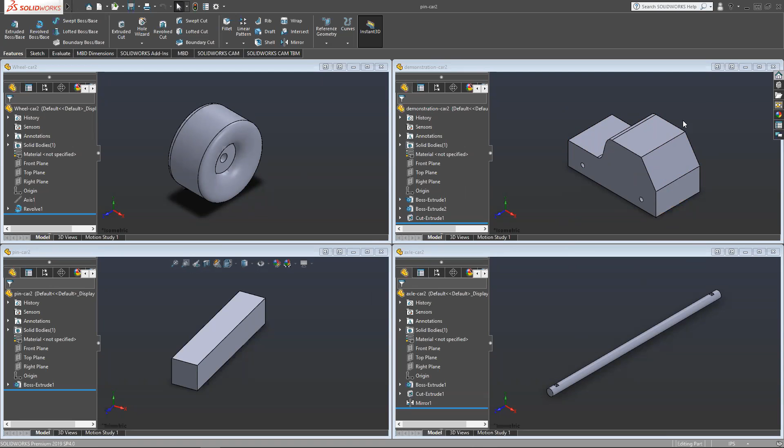So we're going to start with the assembly. If you're going to follow along, you should have these 4 parts from Part 1. One of the things you can do in SolidWorks is go to one of your parts and have it be the main part of your assembly. To start any assembly, you need that main part that's going to be the origin for all the other parts to mate to, which is just where they attach.

So we're going to make the body our primary component. What we can do is go up here to the top left, right where it says new. We can click the drop down arrow or click on new. It'll pop up a separate window. We can go down to make assembly from part/assembly. When we click that, you should be on a new screen and all the documents you have open will automatically appear here.

I have mine named demonstration car 2, and that's my body. Oh shit, that's not drag. Okay, never mind, not drag, just select and click, and bam.

So now we're in an assembly. This isn't a drawing anymore. The name kind of changed at the top. I can't see it, the zoom thing's in the way. But it says assembly, right? Unnamed assembly or something.

So as you can see here, things are different. We have our part here, and we can click the drop down arrow and still see all the extrudes and cuts and everything, and most importantly, its planes. We also have this thing here called mates, which is how things are connected together.

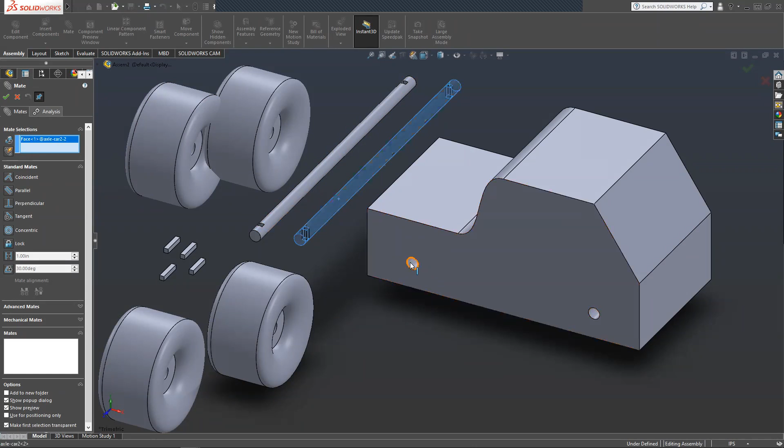So you just start selecting stuff, and SolidWorks is smart enough to kind of know how things fit together. So I don't have any specific type of mate selected, but I'm going to click on the outer surface, the cylinder shaped surface of one of the axles. See, it already says face 1 axle. And then I'm going to click on the inner surface of the car, where I want the axle to go.

And it's already going to concentrically mate it, even though I didn't tell it to concentrically mate. That's what I wanted it to do. SolidWorks is usually pretty smart with these standard mates. So you can see they're called standard mates here on the left.

And it knows pretty much what you want to do. Before you start clicking on everything really fast to put things together, you've got to make sure you click that check mark, or else you'll keep changing the mate selections in this box, and you'll start mating things you don't want to mate together. So always make sure that after you do your mate, click that check mark, and then do the next one. I'm going to exit the mate menu real quick just to demonstrate something.

So now this axle is concentric to that hole on the body, right? But guess what, that's all they are. They're just concentric. So this thing can be all the way over here, and SolidWorks won't know the difference because it doesn't know it's supposed to be anywhere else. But we want this to be like inside the car at all times. That's where the axle's supposed to go.

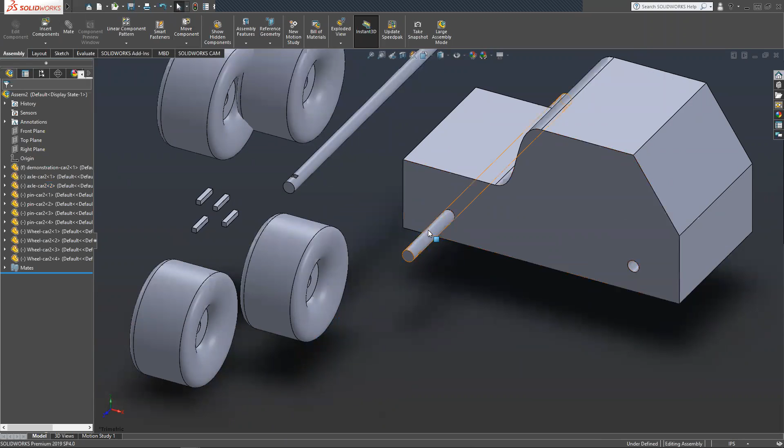So you can add multiple mates to these things, and there's two ways we can go about this. We could either do what's called a width mate and say, hey, this end of the axle and this end of the axle are supposed to be between this side and this side of the car, and put it perfectly in the middle. Or we can mate the planes of the individual parts together. We'll do that one first.

The planes mate is we can click on this drop down arrow for the body, right? We can see if we go to its planes, the front plane, top plane, right plane, that it still has its cardinal planes. Let me just adjust it. It still has its cardinal planes, and most importantly, the front plane is still bisecting it because it's its own front plane.

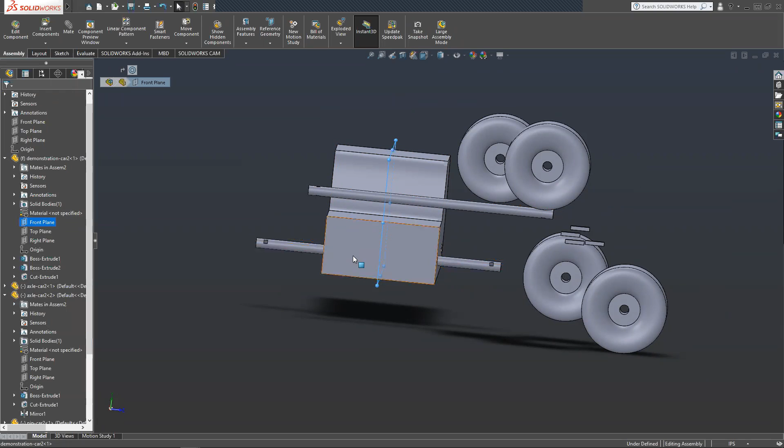And likewise, if we go to the axle of the one we already mated concentrically to our car, you can see it has its own planes too. In this case it's my axle 2, but you might have selected axle 1. So we can select the two front planes. In this case, as you can see, they're almost already lined up, but they're not mated together. We can click that mate, and bam, it already shifted it over. It already knows what you want before you even want it. It's amazing.

Yes, so it already has them selected because we already selected them and mated them together. If we didn't have it selected, say I only had one of them selected, you can click up here in the top left of the viewing screen, just right of the column on the left, and click this little drop down arrow. It might be hard to see on my screen because I have dark theme, but right underneath the assembly you can click the drop down arrow and see all your parts. And they have their own little drop down arrows, see?

Then you can select from, in my case axle 2, that front plane, and it will mate together. You can specify—in this case they already knew we wanted coincident—but if you want parallel, you can specify a distance they are apart or a degree they are apart, weird stuff. But we'll just click that check mark, and now it doesn't move, it only rotates in place. It won't slide out of the body, so it's just rotating in place. And that's awesome.

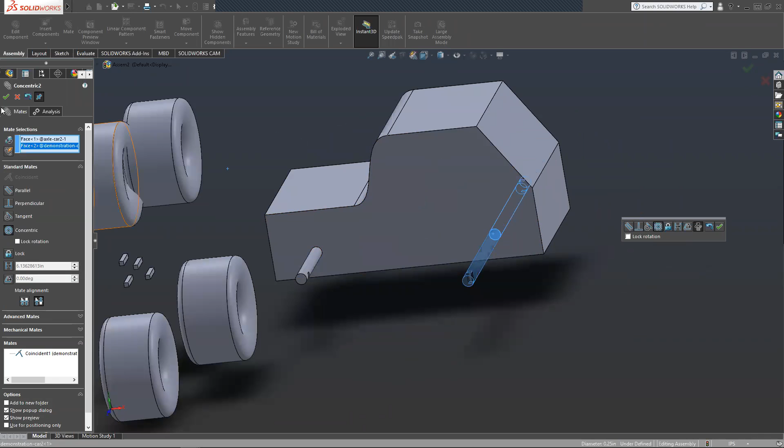Now to do advanced mates, SolidWorks is smart, but it's not that smart, so you have to tell it what advanced mate you want before you start selecting everything. You click right here on the left underneath standard mates, where it says advanced mates, and click the drop down arrow. It will automatically retract the standard mates, so don't keep looking down, look back up. Right here you have things like profile center, symmetric, width, path mate—more advanced ways of saying these two parts are supposed to move together. The one we're interested in is the width mate.

So what this one does is you can select two sides or lines of two different parts or multiple parts, and that'll be like 'width one,' and then the other one's like 'width two.'

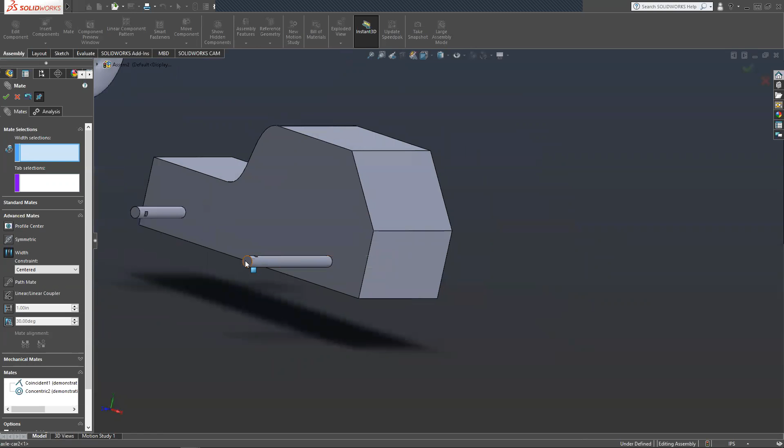You do the same thing for another set of parts, like, okay, you want these to be midpoint with each other, right lined up. So in our case, we select one circular end of our axle, the other circular end, then one side of our car and the other side, and it slides right in, perfectly in the middle. If I get normal to that face, see, it's perfectly flush, you can't even see the other axle.

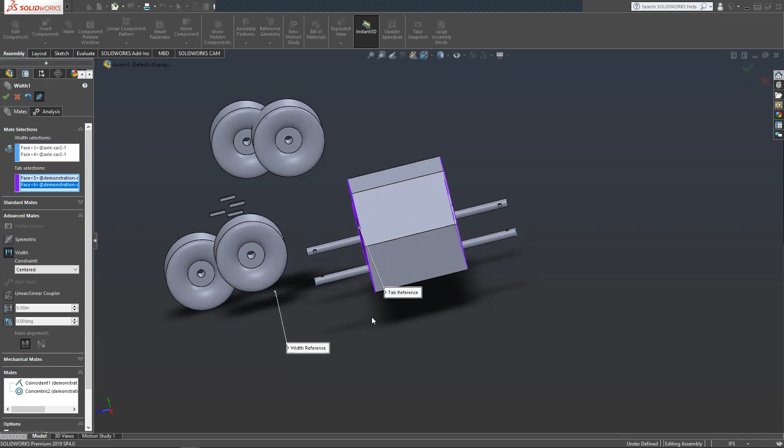That's a good way to fit things perfectly together if the planes don't line up with each other. Like if we designed this axle and just projected it straight out of the front plane instead of doing a mid-plane projection extrusion, the front plane would be all the way at one side, then we couldn't just mate the planes there, but we could still do this because it isn't dependent on the cardinal planes of the part.

So we click OK, and bam, we already got our axles in. Pretty nice. We'll do the same thing with the wheels, but with the wheels we won't have as rigid constraints—they're just kind of going to be on the axles.

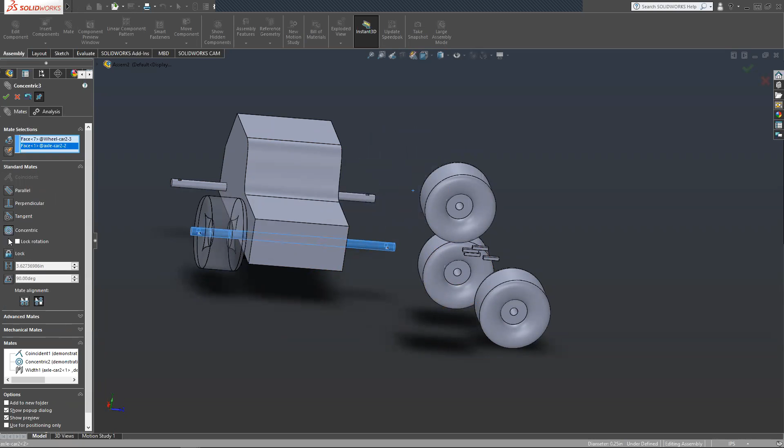So we check marked so we're out of that advanced mate. We'll click on the inside of that and slap it on our axle. Oh sorry, we're still in advanced mates—see, we gotta go back to standard mates. If something's not happening, maybe SolidWorks isn't sure how you're putting things together, so you just tell it what you want it to do. See, it wasn't knowing what I wanted, so I told it, make it concentric, and bam, it already slapped it there.

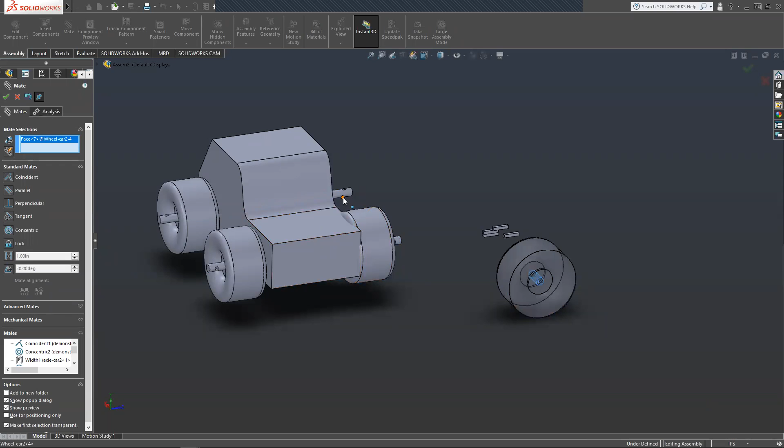Then you can lock rotation and things like that to make sure things don't move around. We'll say okay to that, and we'll do that three more times for the other wheels. See what I mean? Make sure you check mark it before you start selecting other stuff, or you can inevitably mess things up. Bam, check mark. Bam, all right, perfect.

So yeah, these wheels are kind of still floating, same thing with the axles before we gave them that other mate—just floating around. We'll change that in a second. For now, I'm going to put them a little closer so we have a good view of the pin slots. But we're going to make these pins now.

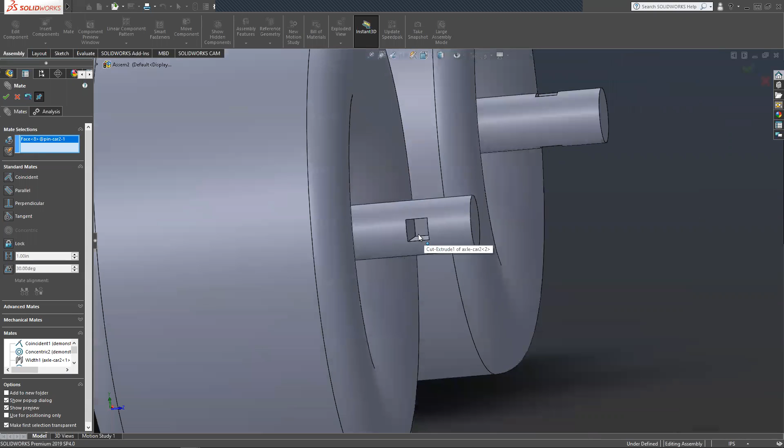To get the pins to go into that hole, you're going to have to do a few things. We can select one face, any face will do, and mate it to the inside of the pinhole. If we check mark that, it's mated to that face and stays there, but it's free to go everywhere else. So we got to specify another face or a line—you can mate edges with each other, with faces, or things. You can mate anything together, really.

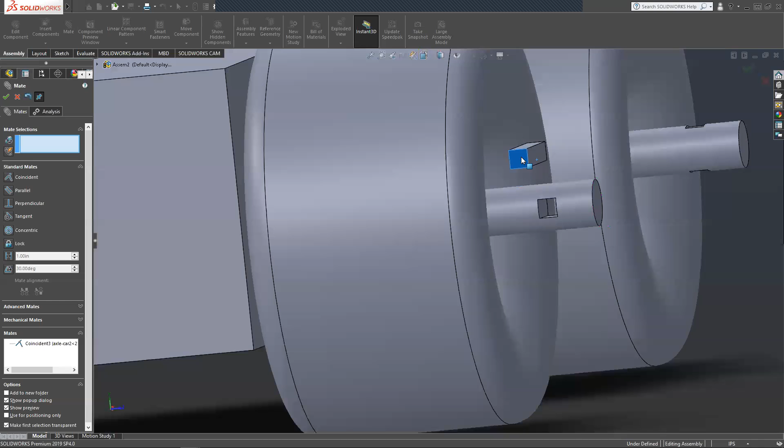So in this case, we could mate this line with the interior face and say coincident, yes. But that didn't really do anything because it's just re-specifying that we're constricted to this little plane of movement. So we need to select this face to mate here to get it inside the pinhole. See, now it's inside the pinhole, but it can still go in and out of the hole and even rotate the shaft. It's pretty cool.

So, is there a way to change this? Why, yes—there's always a way to do things differently. If we go back to our advanced mates, we can do width mate again.

We can select the two sides of the pin, but this thing's rounded—how are we going to do the width mate? If we just select the whole surface, it already knows this thing's circular, and circular things have a midpoint, so it'll put it right in the middle of the circle. We check mark that, and it's perfect. Very nice.

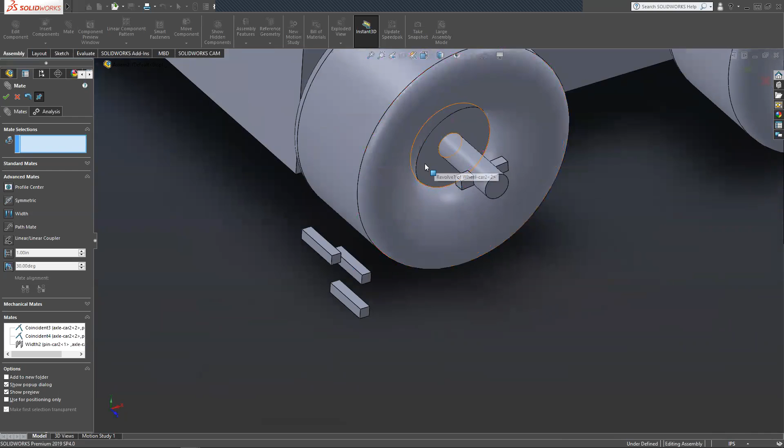Just to make everything look nice, we can select this flat face of the wheel if you design the wheel correctly from the first one. As you can see when you select a part, it knows you can't mate a part to itself unless you have two of the same part.

It's going to gray it out and you can select things through it. This is awesome if you have things inside of other things in your assembly. So we'll make them - oh, we're still in advanced mates, so we gotta go back to standard mates on the left, hit that coincident, and there we are.

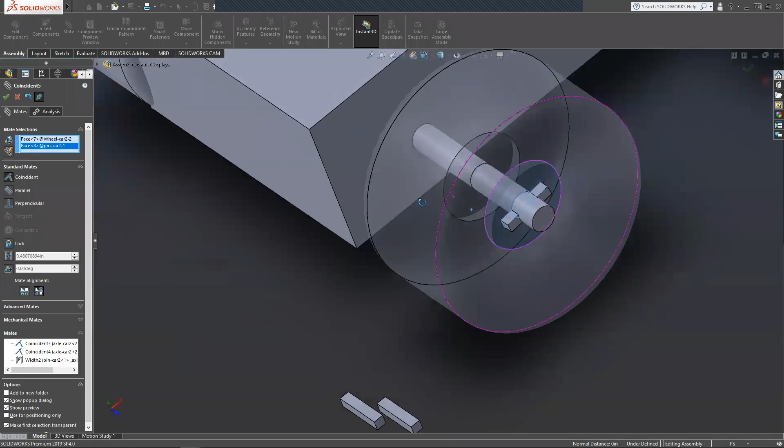Just like we did the width mate with this pin to get it right in the middle, we could have also done a planar mate, and I'll do that for this next one. So we'll get these planes together, slap them all together - bam, kind of teleport it over there.

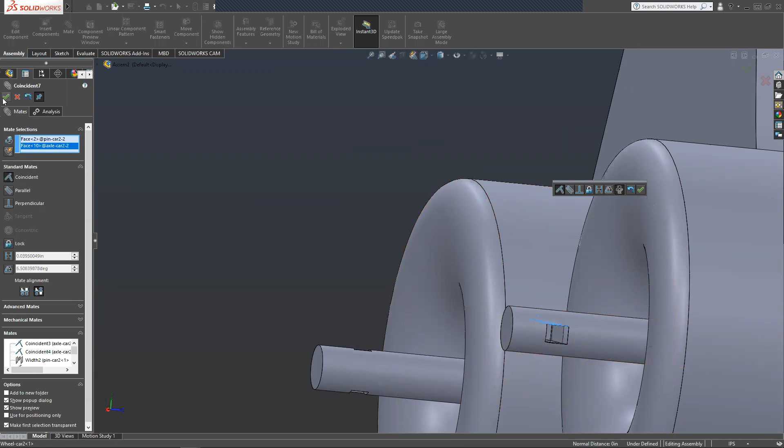So you just need two 90-degree faces to really get things to sit inside of each other. Bam. And then let's see, what pin is this?

What is this? Let me exit mates real fast. What pin is this? Oh, it's pin 2 - see right here, it highlighted it when I clicked on it. So it's pin car 2. Let me minimize some of these to make it look nicer.

So we can select pin 2. We can select its - like I said, this pin was a mid-plane extrusion, so its front plane is right in the middle of the part. And we can go to, this is axle 2 in my case.

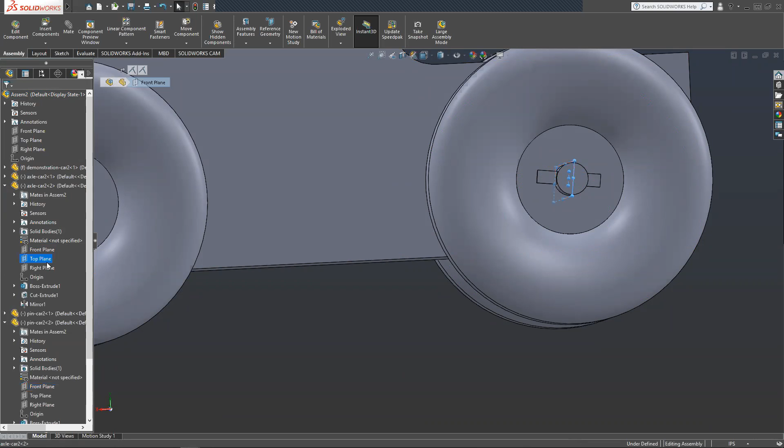Click down on it, and in this case the top plane, and just control click, so I have both of them selected. Here's pin 2's little front plane, and then this is the top plane of the other part.

As you can see, they're almost parallel already, but we can mate them together so it's doing the same thing as the width mate basically. Sometimes doing this is a little faster than clicking all the sides of the width mate, but that's for you to decide - at the end of the day, they do the same thing.

And see, when you have the plane selected, since it's just a simple coincident mate, SolidWorks can already infer what you want to do and just automatically do it. Bam, and so now that's pretty much how you do it. In this little case, those are the two ways you can mate it, pretty much.

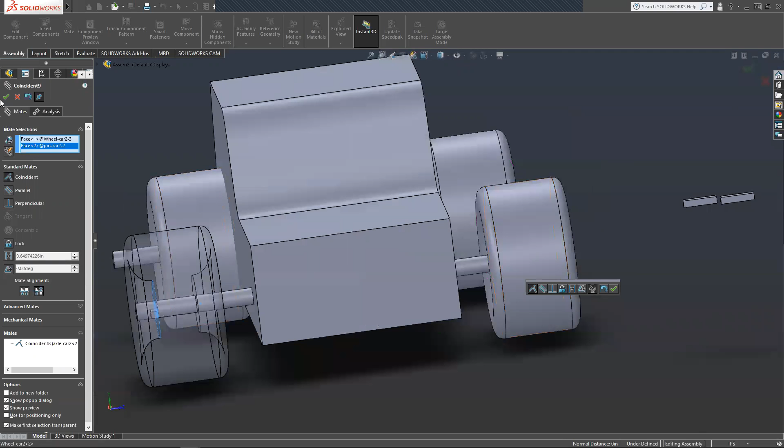So I'll just make these other pins real fast and we'll get on with it. All right, same thing. Just bam - sometimes you gotta move your assembly around.

I like to be freestyling when I assemble, you know, kind of rotating everything around like this. But some people just like to alternate between the cardinal views.

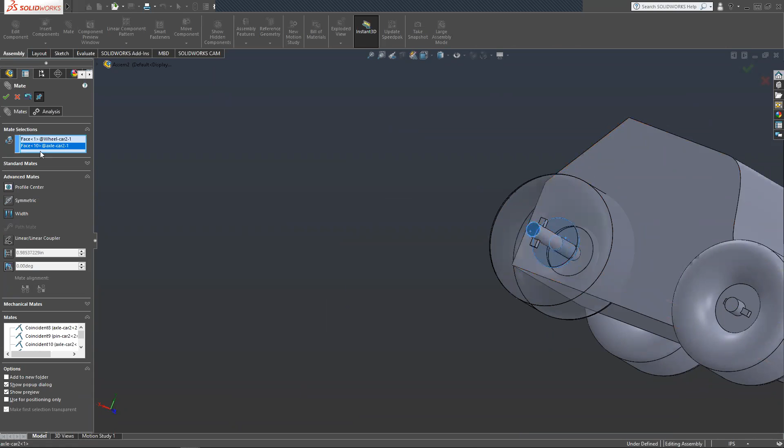Do a width mate for this one. It's pretty fun doing width mates. There's a lot more in-depth mates, but for the purpose of this simple demonstration, I'll just be showing you these standard mates. We gotta go back to standard mate, hit that coincident.

Bam. Oh, what happened there? Huh, what's going on there? I probably misclicked something. So in the event that you accidentally mate something, it is going to happen - let me now show you what to do.

You click - remember I pointed out that there was this mate thing on the left when we looked at all our parts? You're going to click that drop arrow and it lists all the mates you've made. And when you're hovering over it, it shows what's mated to what, in order of what you've done most recently - the most recent things at the bottom, the first thing you did is at the top.

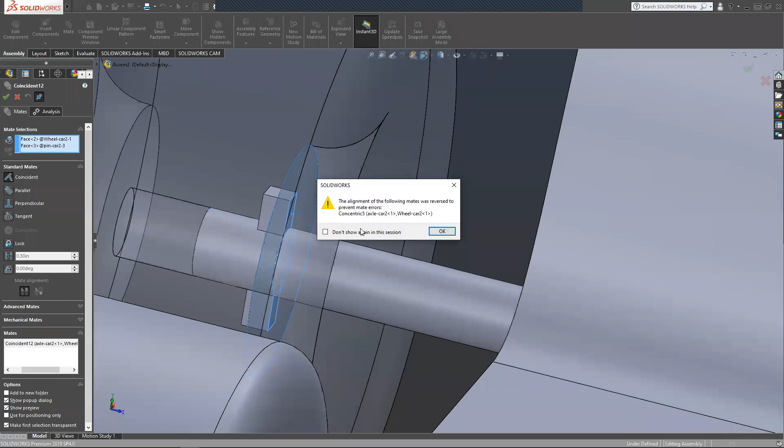See right here, I accidentally mated the front head of this axle with the inside of this wheel. So I can just select that, and you could actually edit it, I suppose, and change from the axle. You could delete that and then select this pin face. Ah, all right, that's not what we want to do.

Yeah, SolidWorks does weird things sometimes, especially when you're trying to make it not do those things. So at the end of the day, it's usually just better to delete this stuff.

When you're mating really complex parts and doing a lot of mates to get these parts to fit together the way you want, you might have to manually line them up in order for SolidWorks to realize that's what you wanted. But this is a very simple assembly, so we shouldn't have to do that.

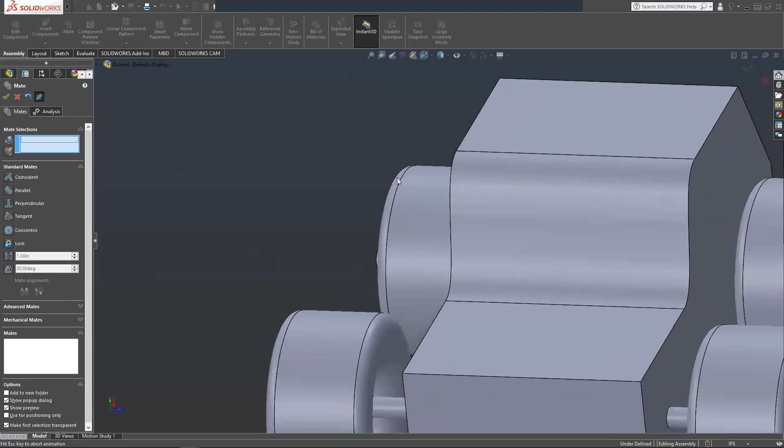So I deleted that incorrect mate and then specified it to make sure I was doing it right. Check mark. Sometimes these mates get a little monotonous - you can undo with control Z. But if that doesn't work, go back and delete. Plus, that mates menu shows you all the mates there are and what kind they are, so in case you need to reference it, always hit that check mark, kids.

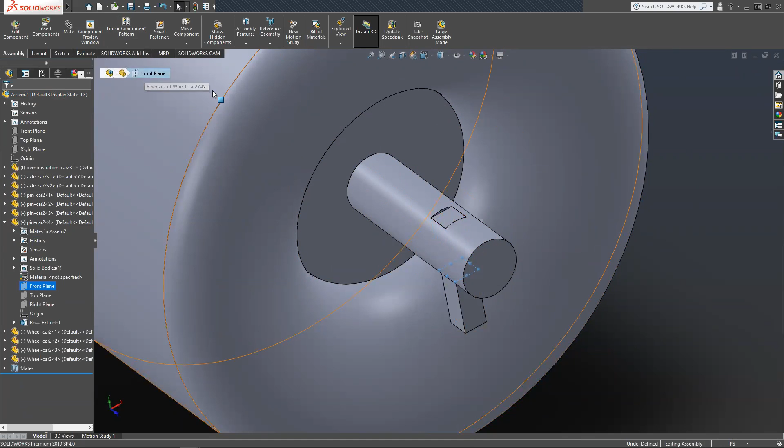It's sometimes easier to do these plane mates outside of the mate menu, just because you can see all your things in this little window instead of the one inside the window. This is axle 1, so it's going to be the top plane, mate, bam.

All right, and that's it. Oh wait, that isn't it - I almost forgot the funnest mate of them all. All right, bam. Now that is it.

We can go like that. We can exit the mates. There's our car. Looks pretty nice.

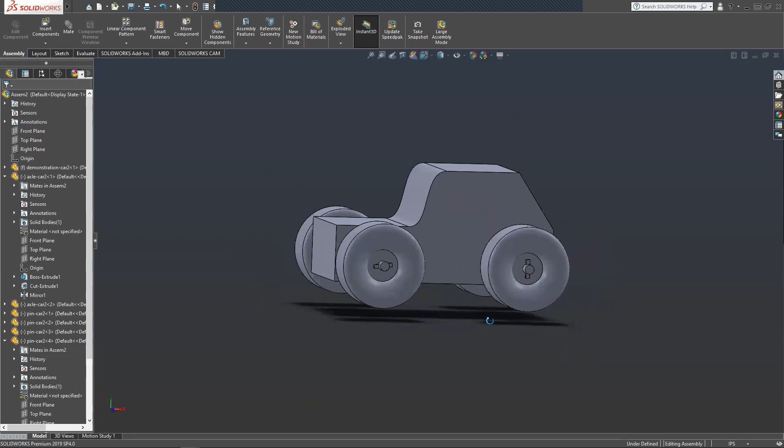So there's a lot more to assemblies, but for this fundamental demonstration of SolidWorks, that's all there is to it. So now we can start drawing our parts, which some of you may have experience with. It's a pretty fundamental skill - if you're taking engineering graphics, that's the main skill you'll learn, how to draw parts both manually and in SolidWorks. But if you're not an engineering major or haven't signed up for that class yet, we're going to start this.

Let's save this assembly. So I already did a first car as practice. SolidWorks assemblies - see, it says type SolidWorks assembly document. They save as different files from parts, so you can name them the same thing as a part.

For instance, my body is also named demonstration car 2, but since it's an assembly, I have demonstration car 2 in my files twice - one of them's the SolidWorks assembly, and it'll say .assembly, see, it says .sldasm. It's important to distinguish that. Maybe you want to say demonstration car 2 assembly - I think I forgot how to spell assembly, man.

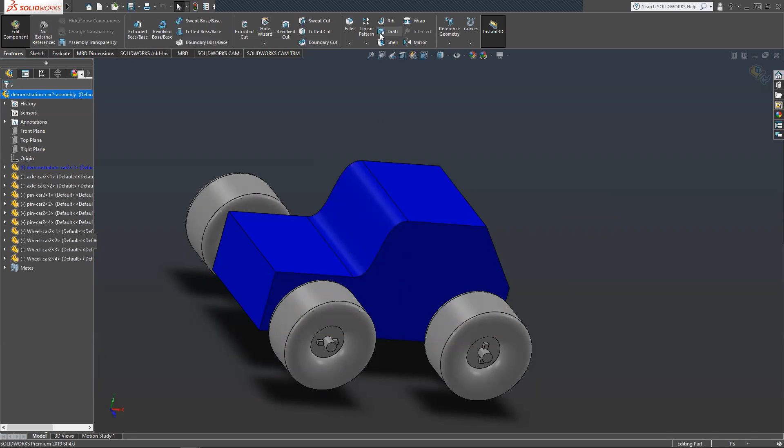So what did I want to do? Let me show you a feature I didn't show you in the first workshop - I forgot to mention the chamfer feature. If we're in features on a part, you can go all the way to the right, right before linear pattern. You have fillet, and if you click the down arrow, chamfer.

A fillet is a radius on the edge of a part - it rounds the part. A chamfer is a flat angle that cuts a 90-degree edge. In this case, we'll slap a fillet. If you select a whole face, it'll try and fillet the whole face. In addition, you can select individual lines - and if you select one line, it tries to reason where it can logically terminate this fillet, so it may go beyond what you already selected.

Fun times. We'll just fillet all these edges. Kind of don't want this circle to be filleted though.

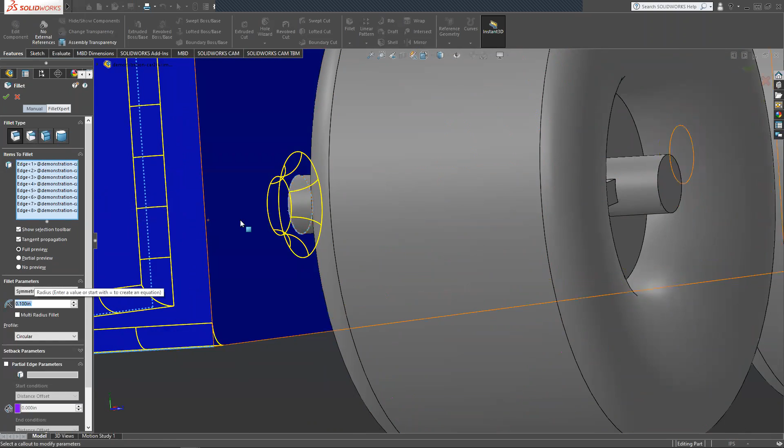I think I see the errors of my ways. I selected the whole face, so it included these circles, these holes, and I kind of don't want that. So sometimes it's better to select each individual line. You can just keep clicking lines and do them on this face and this bottom line too.

In addition to saying you want to fillet these, you can specify on the left side the type of fillet, asymmetric or symmetric, and the size of the fillet. We'll leave it at a tenth of an inch, but you can increase it.

If you're not seeing this preview on a chamfer fillet, it's usually because your fillet radius or chamfer angle/side length is too large. It can't render it because you're cutting the whole part off. So if you're not seeing it being rendered, it's usually because your chamfer fillet is too large. Just try reducing the size until you see it.

That also gives you kind of a scale of what your part is. It's very easy to get lost in scale with SolidWorks because you just zoom in and there's no 'okay, put it back to actual size.' You're kind of just free floating with size, so you've got to look at numbers, implicit things.

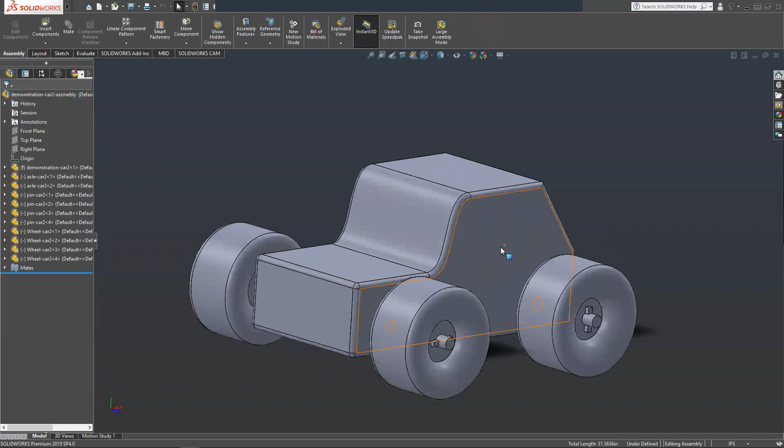So we just exit, check mark the sketch, exit edit component, and bam, we edited our demonstration car body within our assembly. We didn't open the separate part and edit it.

If you open one of these parts multiple times—in this case there's only 4 parts—like the wheel, and I change something, you would get a pop-up saying rebuild the assembly, because it knows you changed one of these parts. You just check mark it and it would rebuild the assembly with the new parts, changing out all the old parts and putting the new ones in.

If you drastically change a part, it'll interfere with these mates, so always be conscious of that when you're modifying parts. Like if I were to delete this inside circle on the wheel and rebuild this assembly, it would give me an error because it no longer has that hole to mate concentrically to the axle.

All right, that's all I want to show you for the assemblies. So now let's get on with the drawings.

Same way we made the assemblies, we can click new—right here on the drop down arrow. If we click new we can hit drawing, but this will make a new one. We want to start our drawings with this thing already selected, so we'll put 'make drawing from assembly/part.'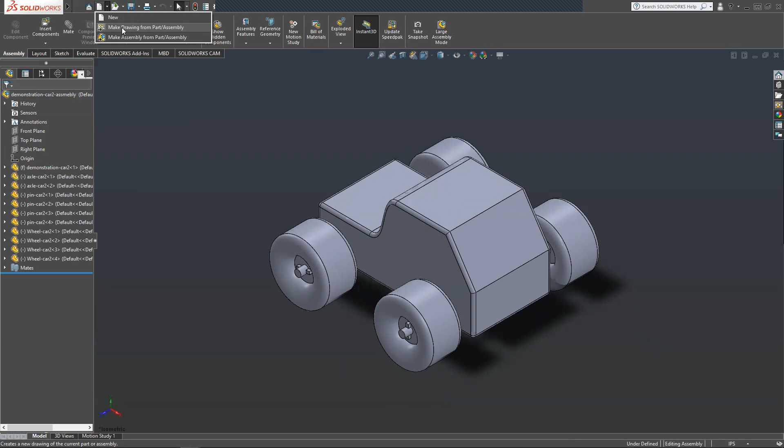We get this—we're now in SolidWorks drawings. We have multiple paper sizes. If you're not seeing all these paper sizes, it's probably because you have 'only show standard formats' checked.

A4 landscape is usually the standard. A4 isn't a standard piece of paper, mind you—it's 11.69 by 8.26. A standard piece of paper, a letter sheet in the US, is 11 by 8.5. That's somewhere in here; if not, you can specify it. But we're going to use this for most intents and purposes—landscape A4 works perfectly fine.

So this is SolidWorks drawing. As you can see, we already have our little paper. It's got some designations like coordinates, and a whole little box at the bottom for information.

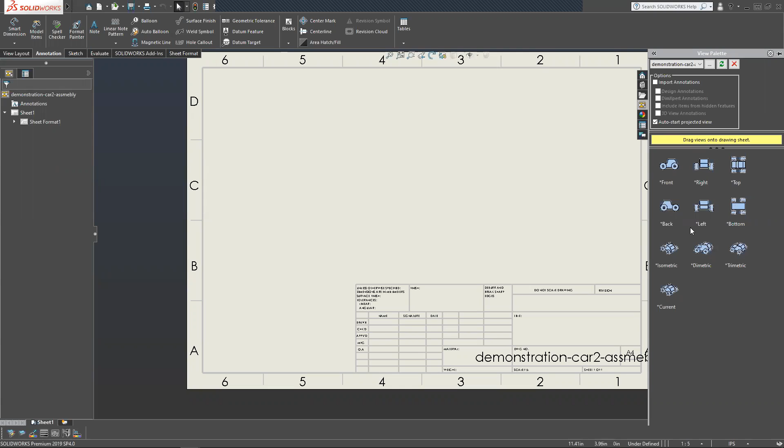Always start with good engineering practice: front view. SolidWorks already knows good engineering practice - it'll give you the right view and top view, 90-degree mated, and you can even slap that isometric in there. Bam, there's our 4 drawings. They look kind of bad, but we'll change that in a bit.

In general format, it's good to have your whole assembly drawing first at the beginning of your drawings, so people get an idea of where the parts that follow fit into the assembly.

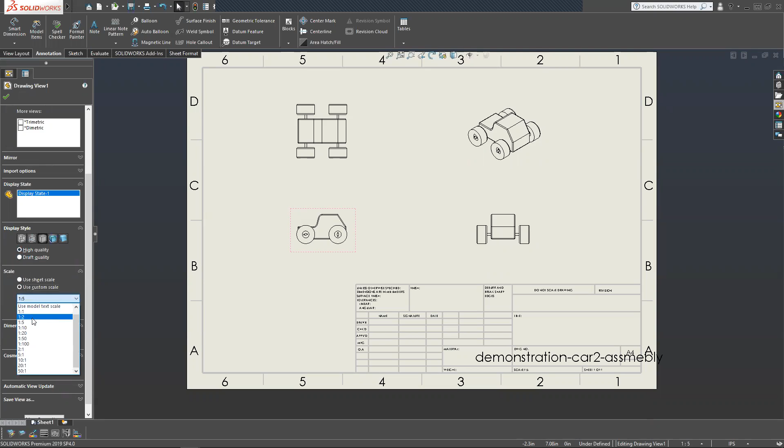So we'll start changing these things to make them larger - it's pretty small on the paper. If we want to make them larger, we select the drawing. It'll put us in the edit drawing view screen on the left side, and we scroll down. One of these tabs is called Scale. We click Custom Scale and set it to whatever we want - see, 1/2. All of these are kind of mated together, so their scale changes all at once.

That's a little big for some of these, so maybe 1/2 isn't the best size. It's kind of hidden, but if you scroll up on the scale, you'll see there's a user-defined option. In the user-defined box, you can specify whatever scale you want. The first number goes to the size of the drawing, the second number goes to the size of the part. So 1:2 means the drawing is half the size of the actual part - or in other words, 2 drawings make 1 part, kind of thing.

Let's put it at like 2:3... bigger. 1:3, perfect. Yeah, that's weird. Strange.

So there's our little drawings. You can put them as close together as we want. Since I put them all at once, they kind of mated together. You can put them individually - you just got to press escape between each one. Now it lets you arrange them not 90 degrees to each other.

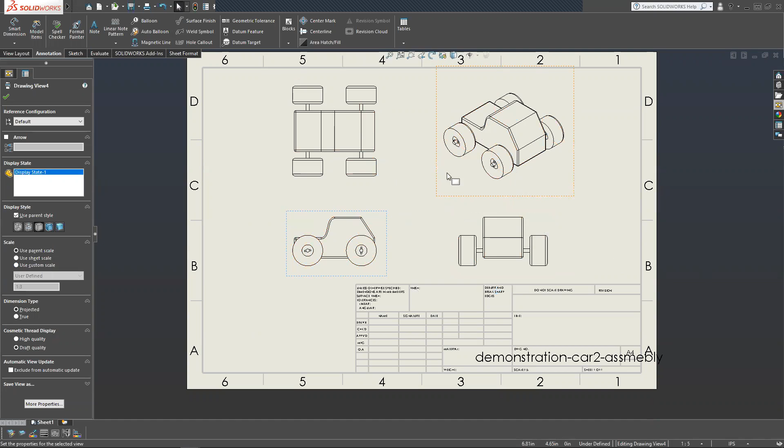But for an assembly, it's generally good to have the 3 cardinal views, and then the isometric just to kind of show you - it's not specifying anything, just showing you how it's supposed to look. So I think that's pretty good. Wish that was a little bigger - you could fit it somewhere if these weren't mated together. But for now, that's good.

As you can see, if we zoom in on the bottom of the page, this has actual information - this is an actual engineering drawing sheet. We can specify things here: finish, material, title, revision, drawing number. SolidWorks always slaps whatever the name of the part is into the drawing number - it's not good practice. It also shows the scale, the weight, and the number of sheets.

Let's edit that. To edit it, you just right click anywhere on your main screen, the main window, and hit Edit Sheet Format. And bam, now you're editing the sheet format.

First thing I want to do is get this giant demonstration-car2-assembly text out of the way. If you hover over it, you'll see the bottom of my cursor is like an A with a dot on it - that means there's a text box there. You can click on it and get this whole little text box screen. Drawing number is usually used to specify what number the drawing is out of a series of drawings. So bam, this is the first drawing in our series, so we'll slap 1 on it.

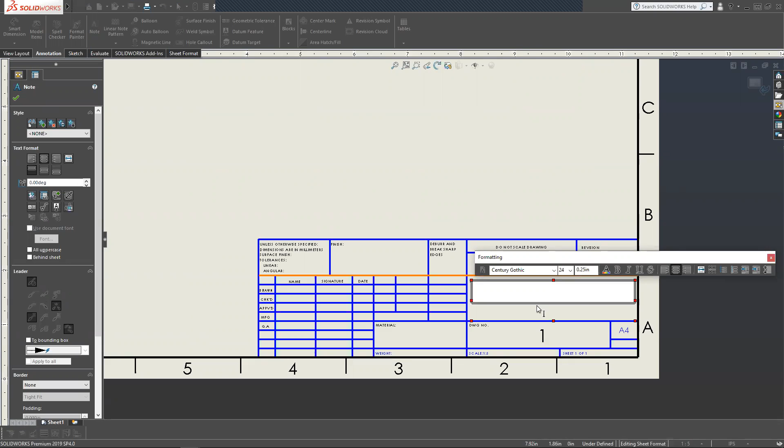Bam. The title of the drawing is usually the name of the part. Sometimes to find these little text boxes, you've got to look for the middle of the whole box and then double click on it. So the title of this one will be like 'car.' And if you press enter, it's going to enter the text, so you've got to press escape.

Bam, you can drag it around. See, right here it's just saying you're looking over the sheet. But if I keep going to the right, bam, there's the little A with the dot, and that means there's a text box there. Right here is where you put your company name or organization. In my case, I'll put UTRGV. Bam, it's the escape.

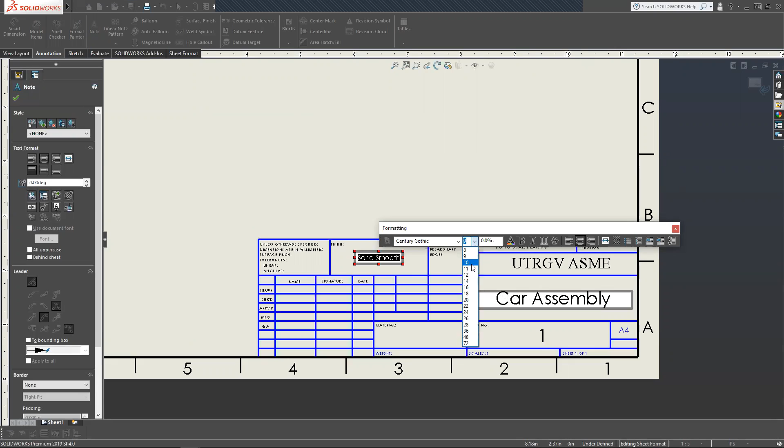Finish. This is a little toy car, so it's going to be made out of wood. So sand, smooth. That's a little small, right? SolidWorks isn't a word processor, so you've got to select what you want to make bigger and then make it bigger. Or like this one's also small, so just make it bigger beforehand.

The material, oak wood, very fine wood, very nice wood. This scale thing doesn't always update. It is programmed, like it deletes the whole scale thing at once, so that means it's programmed to something, but it doesn't update when you change the drawing sometimes. So if you're doing this professionally and submitting these drawings somewhere, always make sure that scale is correct, because these drawings are for someone to make your part or to specify to a manufacturer. You want to make sure all the information is as correct as possible when you make these drawings.

Scale we put was 1 to 3, I believe. Yeah.

Bam, there's even things here, and this is a real professional thing. Put your initials for whoever drew it, checked it, approved it, whoever manufactured it, and then quality assurance, quality control. Then name, signature, date. Like after you print it out, you sign it.

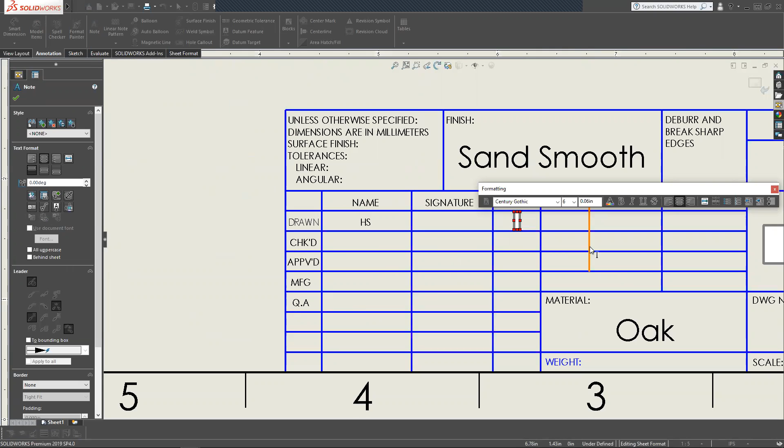The date is 9-12-20. And then this is for tolerances. We don't really have any here. It should be inches. My SolidWorks is in inches. It's weird.

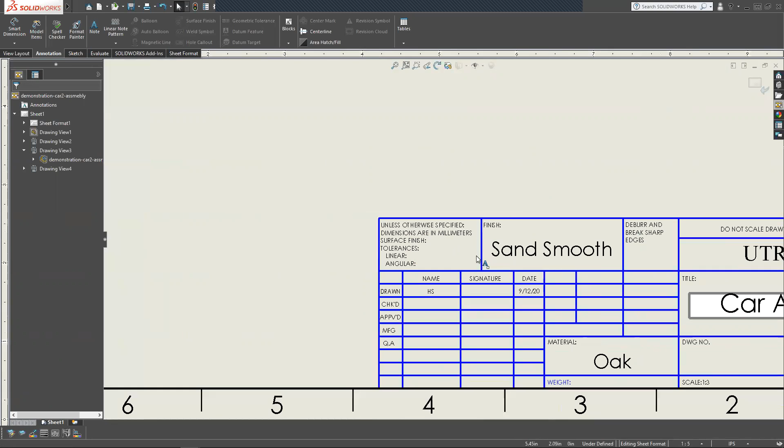This pretty much just specifies that when you're drawing and putting dimensions, if the dimensions don't already have tolerances on them, it's the default tolerance kind of thing — linear, angular tolerances, surface finish tolerances, things like that. But we don't really need to specify that. We didn't go over any tolerances, so we're not going to worry about that.

Revisions is if you have a part that's undergone multiple designs, like multiple tunings of the design, you'll have different revisions. You'll put in here like revision B — you submitted it once, that was revision A, then someone made some change to it, so it's revision B, that kind of thing. We're not dealing with that stuff. So that's pretty much it. We don't have a weight, so we'll just leave it like that.

And whoop, bam, there's our part. So some of you who may be familiar with drawings, this is a huge review. Oh, by the way, let's rename these sheets. It's always good to have these documents organized. If you go down here, there's a little tab at the bottom where you can edit your sheet format and stuff, but one of the main things is rename.

And so we can — well, bam, we can rename the part. As you can see, it gets reflected up here. You can also rename it here, I think. Yeah, you can rename it, but it's just called rename tree item for some reason.

One of the main things that's annoying is that if you keep just clicking new model view or new page, it keeps erasing all this information. It gets real annoying changing it after a while. You can literally just copy this one and Control V to paste it. It's usually good to select move to end, and I'll slap it there. It's called assembly 2 — exact same thing as the first page because it's a duplicate.

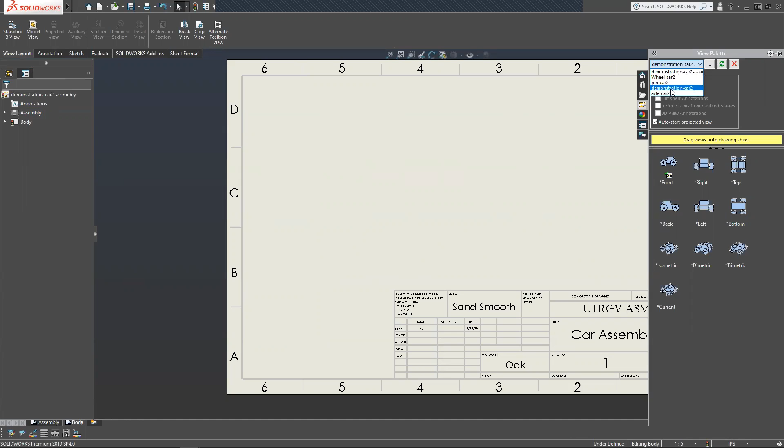So first thing we want to do is the body. In my case, I named my body demonstration car 2. So we'll click on that and see the little drawing views here at the bottom. They changed.

So you can just drag the front view, right view, top view, cardinal. Unless your part is exceedingly complex and you want to show how it looks in a 3-dimensional space, you normally don't put the isometric. We're gonna get into normal conventions for engineering drawings.

Use custom scale. I don't know why it's defaulting to 1/5. It's making these parts look tiny. We'll put 1/2, see? Looks very nice actually at 1/2. We'll check mark that.

It's just real fast. Edit the sheet, because like I said, this sheet was a duplicate of the first one, but it has all the other information. We deleted all the other information we didn't need. See the scale's already... oh no, the scale's 1/3, so we'll change that.

So edit sheet format, we just right click the screen and hit edit. We'll leave all that there. I'm doing this on the same day, so I'm going to change that. We'll change the scale to 1, 2.

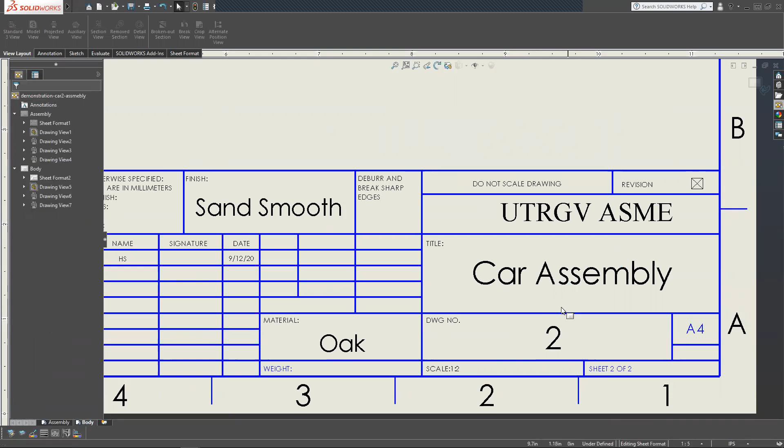Check mark that. You can also press the check mark on the left side instead of escape. The drawing number, this is the second drawing in our series. This is no longer the car assembly, this is the body. And everything else is the same. Exit that.

And what, bam. Now we're just looking at our drawings. To put actual dimensions and things like that, you gotta switch the tab.

Hold on, I'm sorry, I need to go let my cat out. She's meowing.

All right, I'm back. So in order to actually put dimensions, you gotta go right here at the top left. There's a tab called Annotation, Smart Dimension, just like when you were sketching. It's the same thing. And you just start selecting stuff and you start getting numbers. It's very easy.

There's one very crucial thing. The default color for SolidWorks dimensions in drawings is this weird gray color. It doesn't have good contrast, and it's honestly weird. I don't know why it does that. It's not standard, but this is like the default. All SolidWorks do this. There's a way to change it though, and I will show you now.

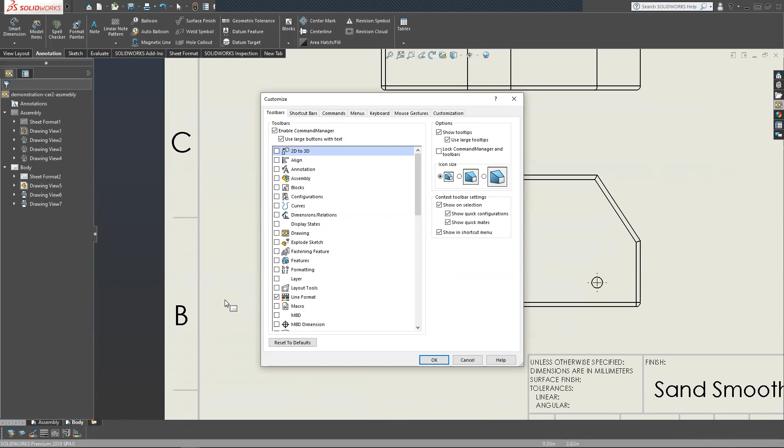So we're gonna go under tools, and we're gonna go under customize, customize toolbars. See, the first tab should already be selected. It's got all the SolidWorks toolbars. The one we want is line format. I already have it checked. If you don't have it checked, click that check and it should appear down here. And we'll click OK after we check it.

So if we select this dimension and we go over here, you have different layers. You can change layers, layer properties, line color. The thing we want to do is change layers, so pop up this extra little text box. It's kind of faded out, but if we hover over, it'll be none. See, none is just putting whatever default color SolidWorks wants. You gotta specify your own. In my case, I have one called format that I specified, and bam, it's black.

Yeah, if you click layer properties, you can specify new colors, new layers is what they are. And what these let you do is you can have like one layer that's just diameters, and you can specify all the diameter things a different color, that kind of thing. In our case, we just want all our colors to be black because that makes it very good contrast, easy to see, very easy to understand.

In our engineering drawings, you can even specify the style of the line. You can make it dash, solid, thick, thin, that kind of thing, the thickness of the line, those kinds of things. If you want to make a new one, you can click here, be like layer one, see, and then you can change the color, that kind of stuff.

You can go to town with it, but for now I just want my format, because my format is good. Now that we're in the document layer format, all of the other dimensions we make should be black. So yeah, that's the general thing.

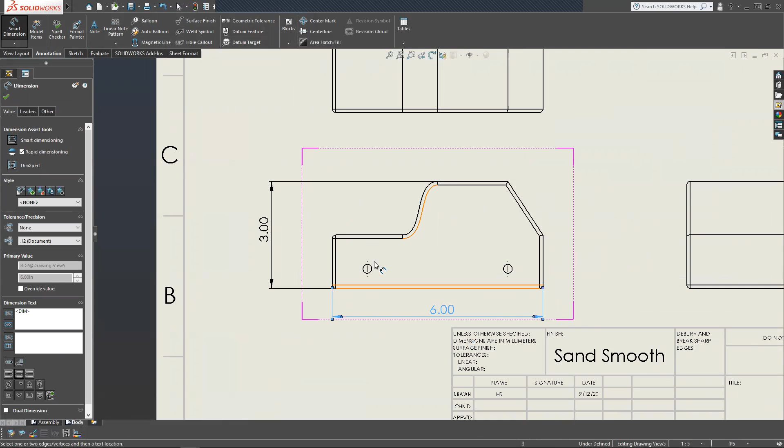Now we get into doing things the engineering way with these drawings. You specify things you think should be specified and try not to overcrowd it. That's one of the main points. Someone is going to be trying to read these drawings, and the last thing you want them to do is think there's too much on this paper and not do it correctly.

So things like that, specifying the chamfer, specifying where things are. This isn't the best part to be specifying things on, to be honest, but for all intents and purposes, this is how you make these drawings. You've got to know where these holes are placed. As you can see, SolidWorks recognizes that these are holes that go through the part, so it gave us a nice little center mark for these holes, and we can specify from there what these dimensions are and where these holes belong.

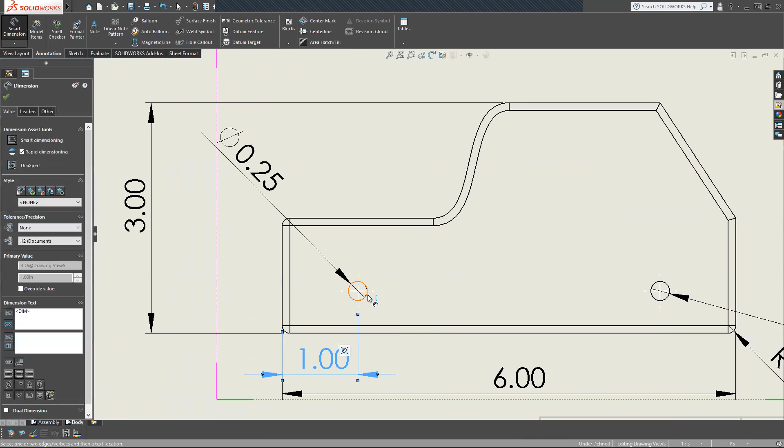If we click center mark to center mark — that's weird, it did that. If we click hole to hole, bam, right there, it gave us the distance between their centers, that kind of thing. You can drag these around. If they're not centered, when you have a dimension selected, it gives you this whole menu.

In it, you can specify the precision of the dimension, like 3 digits or 2 digits — it defaults to whatever the document is set to. You can center the dimension; see, there's where it says dimension text at the bottom. There's this little center button on the left, and to the right of it is the offset text button. I'll show you what that does right now.

Just center these. You can do nested dimensions — why did it do that? Stop it. SolidWorks sometimes shifts things around. In general, you want to keep your dimensions out of this box because then you're overlapping with text. Sometimes you've got to move things up to get ample space. It's good to nest your dimensions like this, just as long as it's clear what you're trying to convey.

But as I was saying about the offset text button — again, when you have a dimension selected on the dimension text tab, if you click it, this thing is now on the side instead of sideways. That's sometimes good to make these things easier to read. You can also do that, things like that.

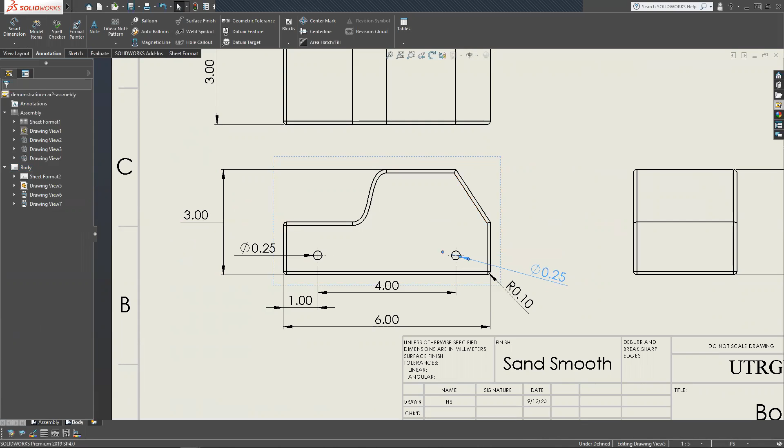I'm not going to tell you every little thing to define on this part — though it would be good to define this, I suppose. You should know what needs to be specified on the part you're designing. It helps to think about it like if you were actually going to make it. Since we're university students, we can't employ other people to make our parts — we are going to make it. So it's very vital that you specify the dimensions you need as straightforward as possible so that you can follow them when making your part.

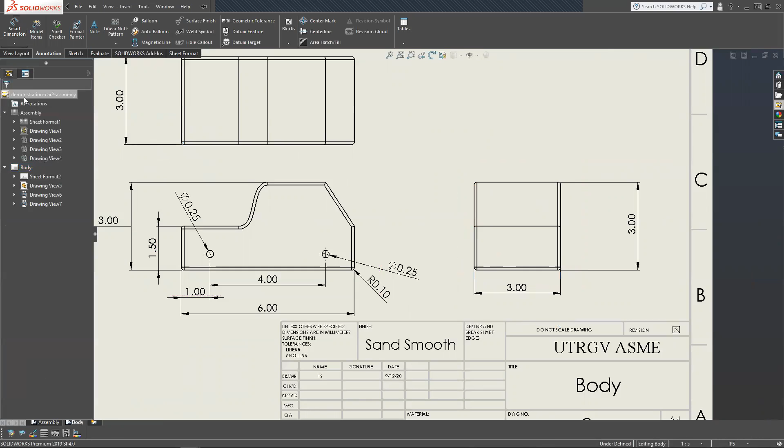I hate to say it, machinists aren't always the brightest people, so if you can do the math for them, that'd be awesome. And it's not just for machinists — it's also for yourself if you're making the part.

Like I said, this is redundancy — see, I already have this 3 and 6 there. It's kind of redundant, just to reiterate what kind of view it is. It gives you a better three-dimensional feel, like seeing it in 3D. So we'll check mark that. That's good — body check, drawing 2. That's good, all right.

Well, we're done with our second drawing. So now we do the same thing. We still have our assembly sheet copied, so we can just Control-V to paste it, move it to the end, same thing.

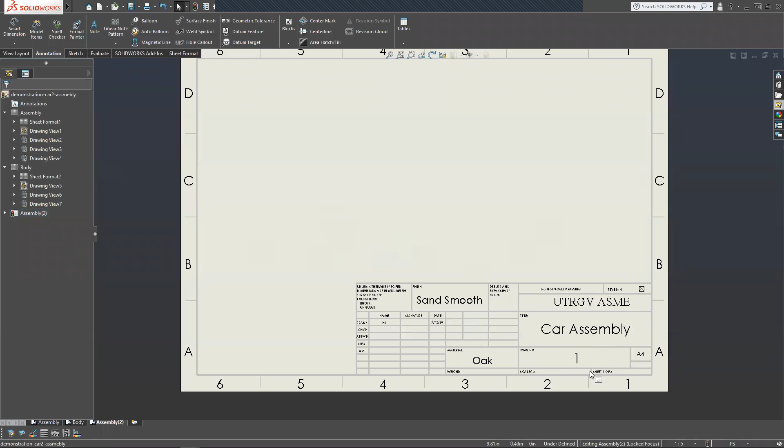Actually, the thing that really helps — yes to all — is if you copy something like this, like you do your page. You make your little page. Watch, let me edit sheet format. Let me just clear that. Clear that. And right here, just set the scale to like nothing, right?

It's got everything we know all of our parts want. It's got the name of our company, it's got sand smooth — all our parts are going to be sand smooth, they're all going to be made of oak. It's got my name, it's got the date, right?

We're going to exit that drawing view, and then we can copy this. So now we can just paste a blank page without having to delete the other drawing views. This just helps speed up when you're making drawings. Some assemblies have 50 to 100 parts, and you've just got to try to make the drawings fast — the whole point of this software, CAD and stuff, is to make drawing things faster. So we'll do the axle next.

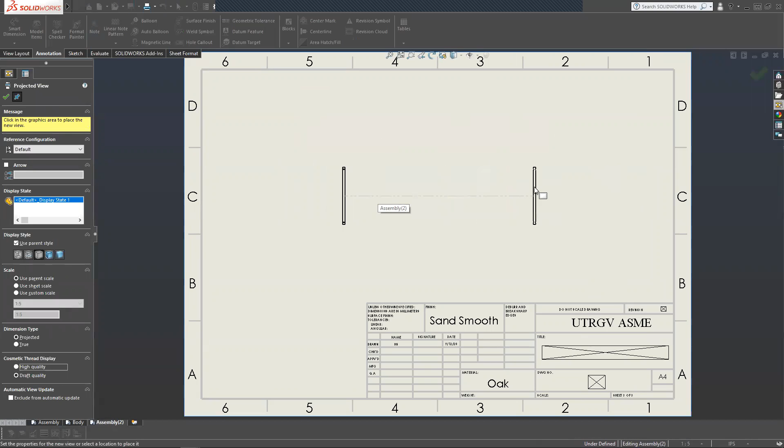Oh no, alright, so here's the fun part. We could actually fit it one to one, but standing it up is pretty janky. We don't really want to do that.

So if we want to rotate a drawing view, we can right click the drawing view, go to zoom pan rotate, and it'll pop out this menu. We can click rotate view, and it's got a little clockwise move. It'll pop out this dialog box and ask for degrees.

In this case, we're going to move it 90 degrees. We'll check apply, and bam, there's our same view rotated 90 degrees.

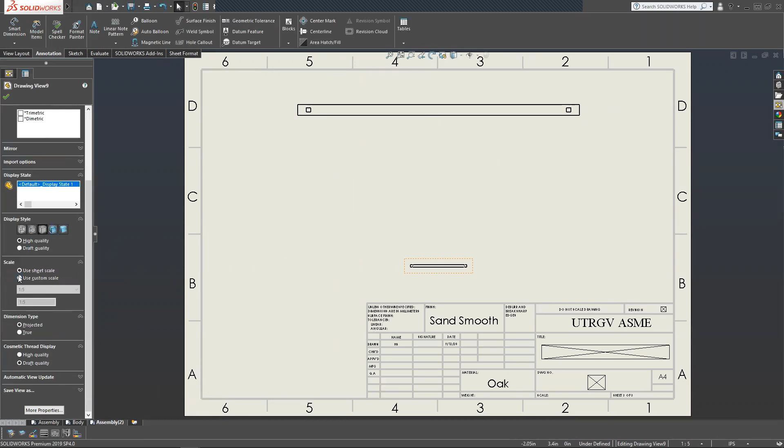This is awesome because now we can fit that and the right view together. We can put the right view in. If it's not letting you select the scale you want, make sure you click custom scale, then you can specify that. No, I want this to be custom scale, 1 to 1. Bam.

So that's pretty nice, a neat little trick to rotate a part in a drawing view. Not every engineering drawing has to use those cardinal views, the front, right, top. Some parts, like this axle, are extremely simple, so it just helps to specify only the main things you need. I'll show you some other tricks in a bit.

Another thing you can do is, if you have a drawing selected, go to this left-hand side and specify different ways of viewing the part. In this case, we want hidden lines visible, which shows boundaries within the part, like holes. This helps visualize that this square in the top view or front view goes all the way through the part. I see what's going on here. So that's a check mark from me.

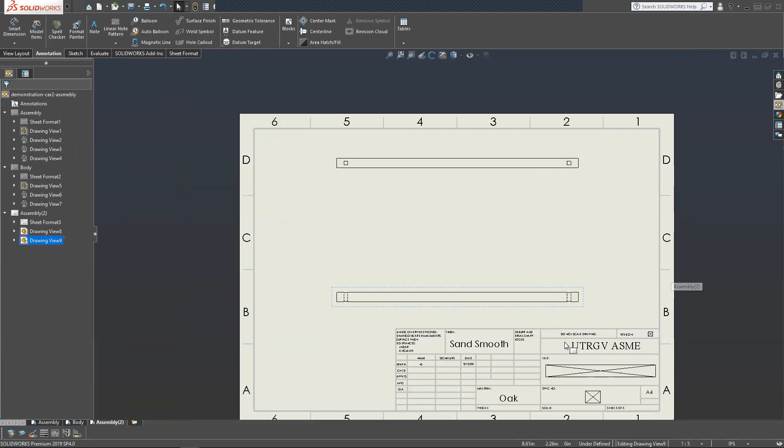What are we going to do next? Well, I'm going to slap a name on here. It's going to be Axle. Alright, press escape, drawing number, this is 3. And I'm going to exit edit sheet format, that's in the top right.

Let's do some basic dimensions. Yeah, that's pretty good. I personally don't like that it's sideways like that, so I'll put it like that. It's pretty nice.

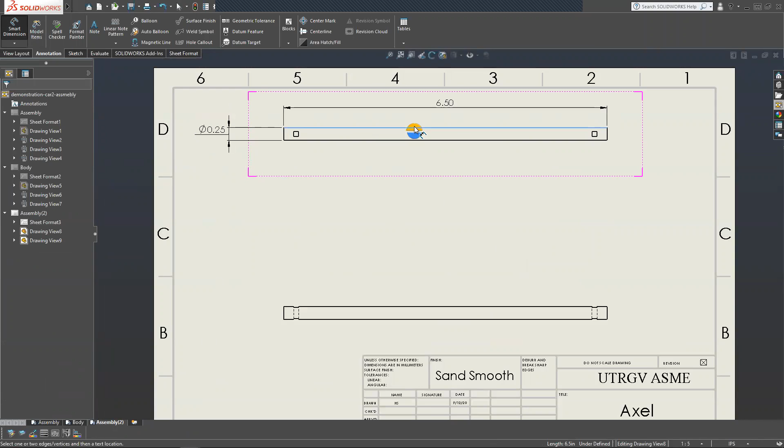You can click two lines to get the length, or just click the line that is the length if it goes all the way to length. If you have a chamfer on that end, it's not going to go all the way to length. But in our case there's no chamfer, it's flat right at the end, so it will give us the direct measurement. We'll check mark that.

We can slap the same thing here just to show, it's the same thing just sideways. Now we want to specify that little square's dimensions, but it's pretty small and it'd get pretty congested trying to put a bunch of lines there.

So what we can do is go back to the view layout tab at the top left, and go to detailed view. We can just zoom in here, click on an arbitrary point, and it's going to start forming a circle. We can drag it out, and bam. So this is a zoomed in or detailed view of our part. We can just click it where we want it. SolidWorks is smart, it knows what you want.

We'll say detailed view, it'll increase the scale of the part. We can also change this, we can specify our own scale the same way. Right here, scale, we could put whatever scale we want. In this case, this 2 times view, and 2 drawing equals 1 part, so it's doubled the size.

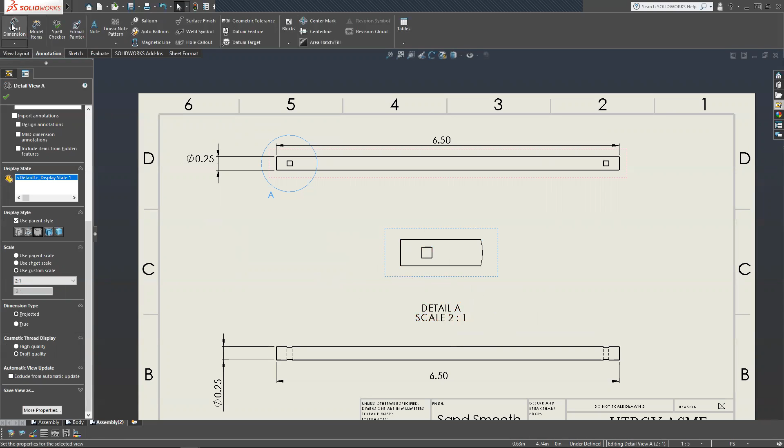This is fine, and we can start dimensioning here, except I want to specify where the center of the square is from this edge. So in order to do that, I need to put what's called center lines. If we're on annotation, all the way to the right is center line. You choose two lines and it'll put a line right in the middle of them.

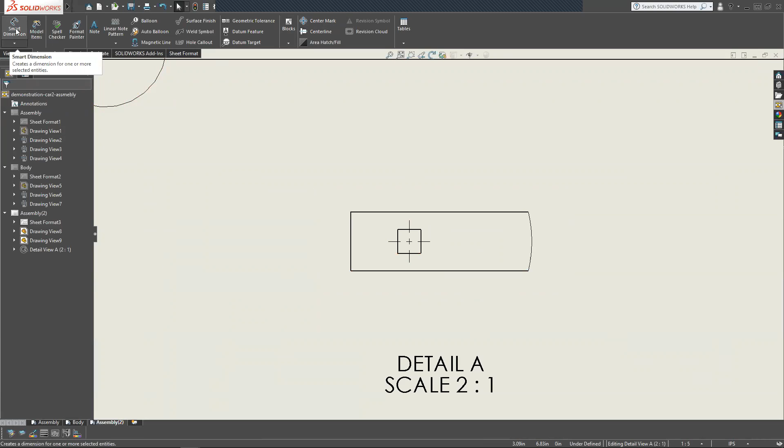With circles, there's this one called center mark, and it'll do it automatically. You just click the circle. That's very good for saying the center of a circle is this far away from this edge, so they know how far to go on a mill from that edge to drill it, or make it, or whatever contour shape it is. So smart dimension will specify this.

Oh right, this is kind of like auto placement. If you have awkwardly positioned things, sometimes hovering over the circle will help you. I know one time I was positioning something really weird, at a certain angle, projected from the drawing view. It was kind of weird, and then I just hovered over that circle and it fixed it completely. I was like, oh nice.

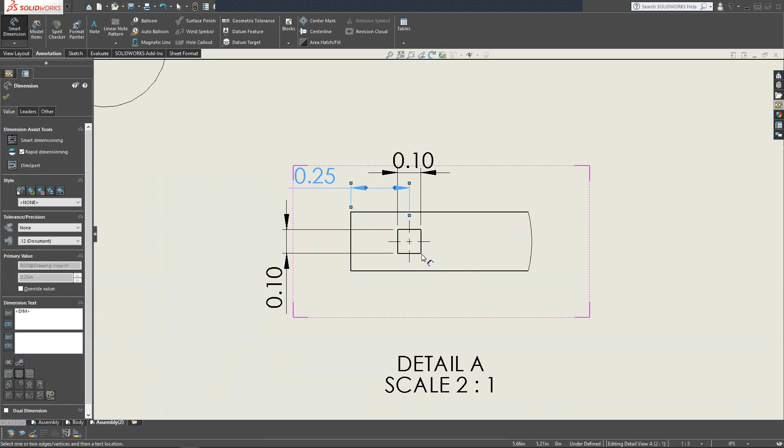Awesome, it's awesome. So in addition to that, I want to specify how far from the edge this was. Not the best drawing views, but straightforward.

In the case of this dimension, is this 13th of an inch, or 0.13 of an inch? No, it's actually 0.125 — it's just getting truncated because of the document precision. So we've got to go to the dimension, with the dimension selected go to tolerance and precision, and specify that we want an extra digit. And there it is.

And it shot it all the way over here. So that's pretty good, I like that.

That is very nice. You can rename these detailed views whatever you want. Usually they go down the alphabet, and they keep preceding each other. If I made another detailed view on another part, it would be B because A is here. So I think that's good.

All right, we need to rename the sheet. Come down to the bottom, rename, or you can rename it here on the side. It'll be Axel. Check mark it, it's good.

Right here's the add sheet, and it would give you a default sheet, like the first one we edited. Again, to save time, we're just not going to deal with that by having our own default sheet to copy paste. Oh, assembly 2.2.

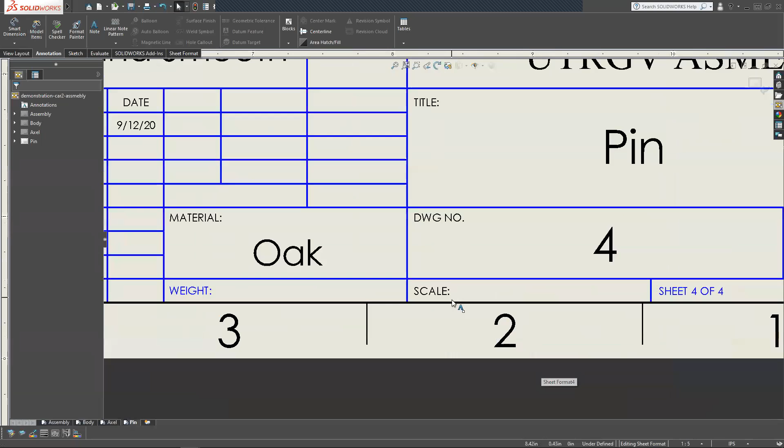And the scale is, well, we haven't put the part in. I'm going to tell you right now, we're going to do this 2:1, as in 2 parts equals 1 drawing, or the size of the drawing is double the size of the parts. All right, so that's good.

Escape, exit sheet format. I'm going to click on our little view palette right here on the right. We're going to go, wait, is the pin—okay, pin car2 is here. So you can see this pin is exceedingly tiny. So what are we going to do about that?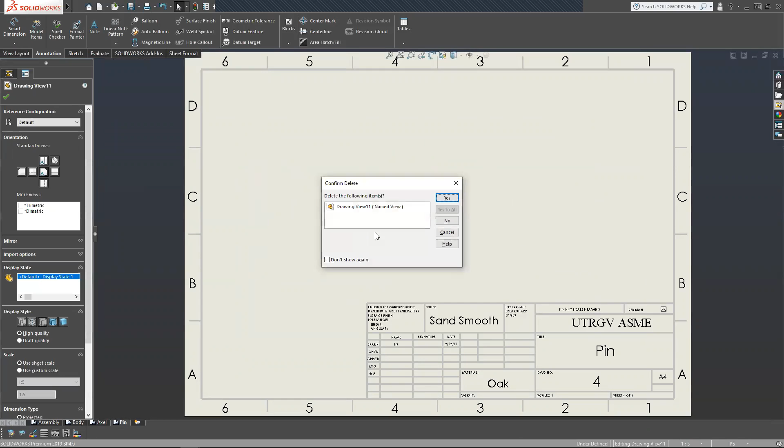Like the other one, this is an extremely simple part. I'm just going to delete that. Let's do it just top and front view. So just top and front. It's an exceedingly simple part, so we really only need 2 views to specify everything we need about this part.

And like I said, we want this to be 2 to 1. So on the scale, we're going to scroll up, look for that hidden user defined, we'll put 2:1. We'll press enter, and now this looks actually sizable.

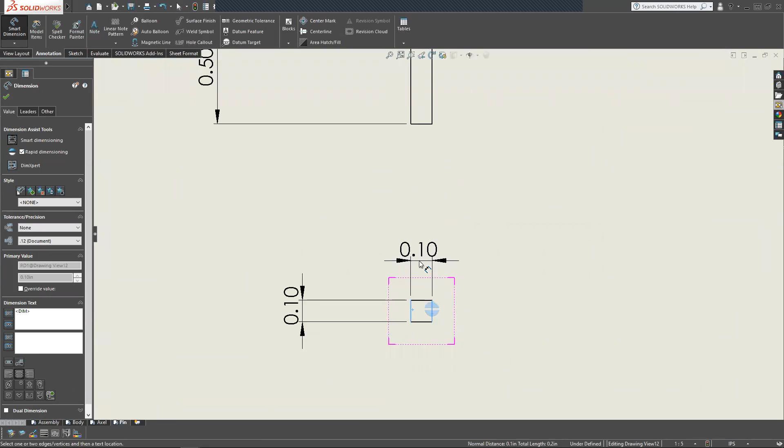I'm going to smart dimension it. 1/2 inch by 1/10 of an inch. It's kind of — add that little layer of redundancy. Sometimes you just got to zoom in, and that looks good. That's pretty straightforward.

If there was anything to be changed, it would just change this to inches. It should say inches, I don't know why it's saying millimeters. My SolidWorks is in IPS. Yeah, just so that everything's in inches.

But we can also specify that. So if we're in the annotation tab here at the top left, same place where the smart dimension is and stuff, if we go a little bit to the right, there's note. This is just like any free drawing you want to write. This is very good for any specific specifications of your part. For instance, threads — you don't normally smart dimension threads. I don't even think smart dimension can do threads.

You normally just type like thread and then, I don't know, half inch, not 12 dash, like half 18, you know, and you'd have a line pointing to the hole or something. In our case, we just want to say note colon scale.

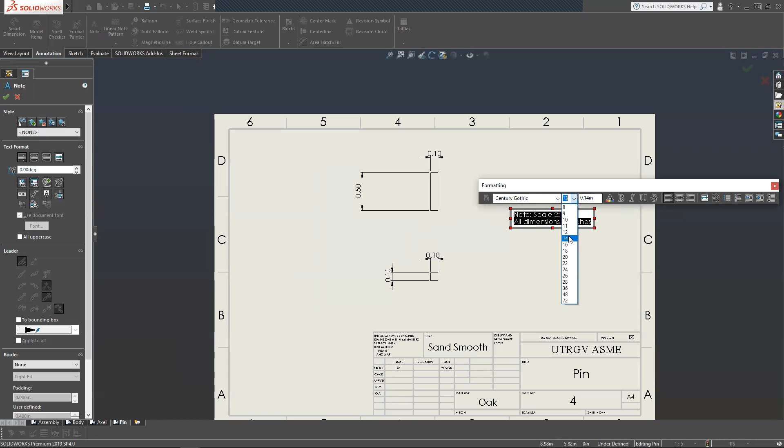You can make this larger, slap bold on it, now anyone can see that. Put it in a place that's easy to read, sometimes in the middle isn't good. I misspelled dimensions probably, anyways, that's very good.

For threads, you need to put this note. Any other specifications that you can't describe with simple dimensions, you can add. That's again just to help anyone who's going to manufacture - you specify these little things that need to be done to make this part. There are specifications like heat treatment processes, those kinds of things you just slap on the end - heat treat, hot dip it, whatever you want done to it.

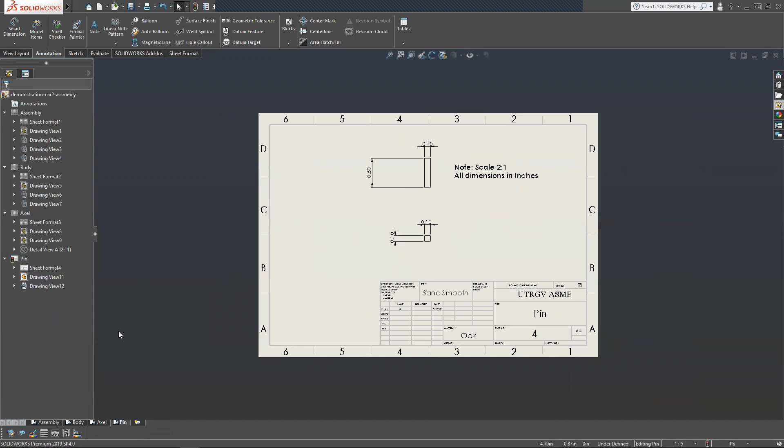So that's it for the pin - again, a very simple part, very simple drawing. We're just going to copy paste, Control V, move to end. This is our fifth and final drawing.

Edit sheet format. Title will be wheel. Drawing number is 5. Scale will be... is it still selecting all of the scale? Oh no. Alright, yeah, 1:1.

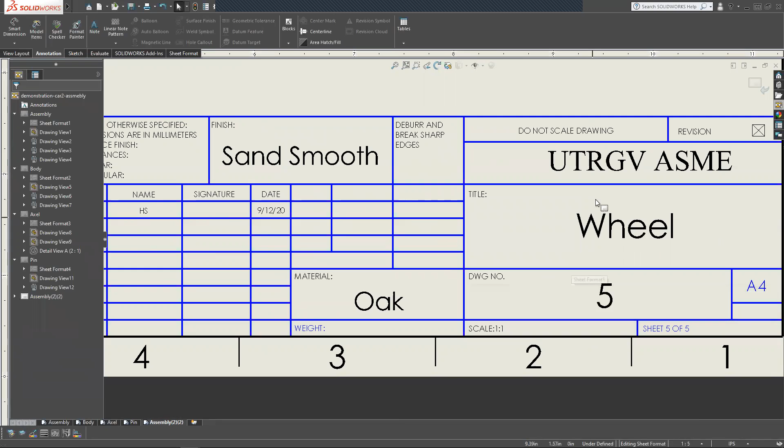That looks good, so we'll exit the sheet format. While we're on sheet format, we'll rename the sheet. This will be... I'm gonna press escape instead of enter. Name, enter.

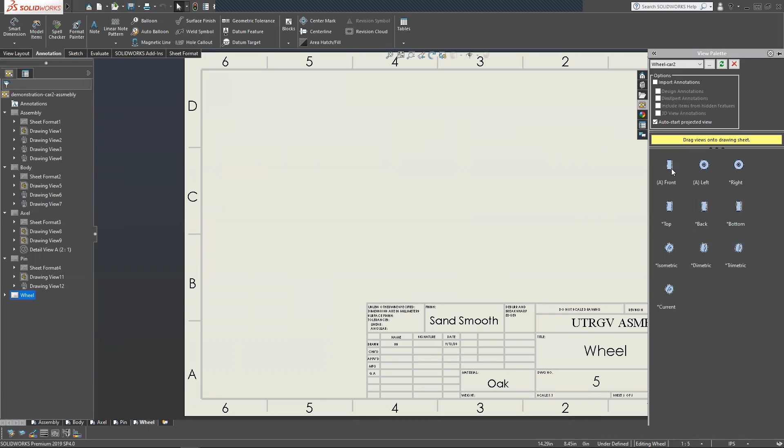We want to again go to our view palette, little tiny icon on the right. We're gonna select our wheel, and then we really only need 2 views. We'll do a special view just to really show the inside of the wheel. So we really only need the front and the right view. We'll change these to 1:1. Let's bring them down a little bit because our special view is going to be somewhere at the top.

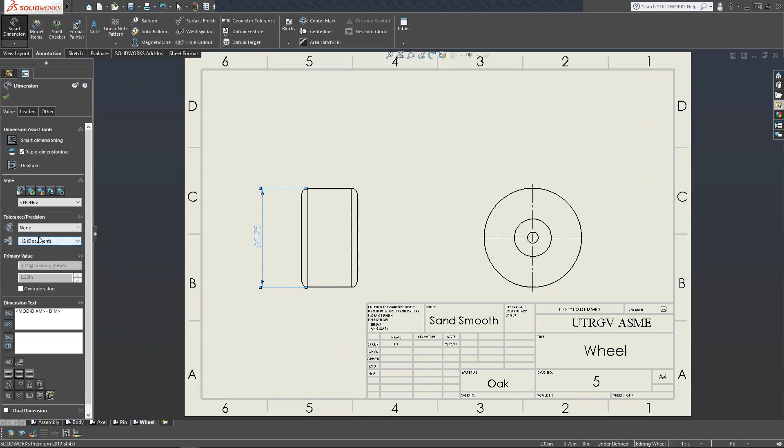It's smart dimension. By the way, if I didn't mention it, this phi symbol, or Norwegian O letter, is diameter, just in case you didn't know that. Center that. SolidWorks is doing this arrow thing - try to line it up 90 degrees, especially if you want it to be 90 degrees. I like the 90 degree line up, it's pretty good, pretty Gucci. Yeah, you can nestle things under each other like that.

30. We kind of splined all these things, so this radius isn't exact, so there's not really a point in defining it.

But yeah, so the special thing we want to do, beyond the general dimensions of this wheel, is put a section view right in the middle of this thing so that we could show how it looks on the inside. Because right here, this is supposed to be the side profile, our front profile in this case, but you don't really appreciate how it looks when you get towards the center. This whole surface is curved, but you can't really see that curve. So we're going to cut it in half and show that section.

The way we do that is we select one of these drawing views, go to View Layout, and at the top left, all the way to the right near the same section where Detailed View was, just a little bit to the left, is Section View. You select that, and it's going to give you this thing already, and you can drag it around to see which thing you want to section.

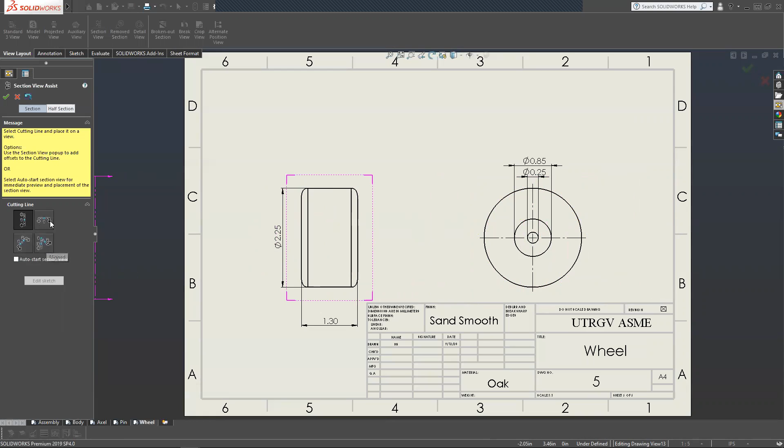If we section this drawing like this, we're going to get the same kind of view as we have on the right, so there's no point in doing that. You can change the cutting line to horizontal, auxiliary, at an angle, or like a line - all these options. This is kind of for breakaway views and stuff.

So we'll do horizontal, and do it on this one. We want it to be right at the origin, it'll kind of snap to it. We'll click it, and then click this check mark, OK, and wha-bam. See, so now we have that cut in half view.

It already has the hatching added, making it look real professional and stuff like that. Usually this is mated, so you can't really drag it around. I think maybe there's a way to break that mate, but I'd have to look for that.

But for now, you can change the scale of it if you want, you can do all that stuff. See, it's section BB because these lines are B, B. You can reverse the direction of these lines and stuff like that. Usually they point towards your drawing. If they're not, you should make them point towards your drawing. You just kind of click them and change the direction.

So as you can see, we get this nice little view. This radius is already defined, but we kind of want to specify how wide this cut is through the middle, like how wide this flat part is. So we'll just go back to annotation, smart dimension, bam, bam, and there it's 0.6 of an inch.

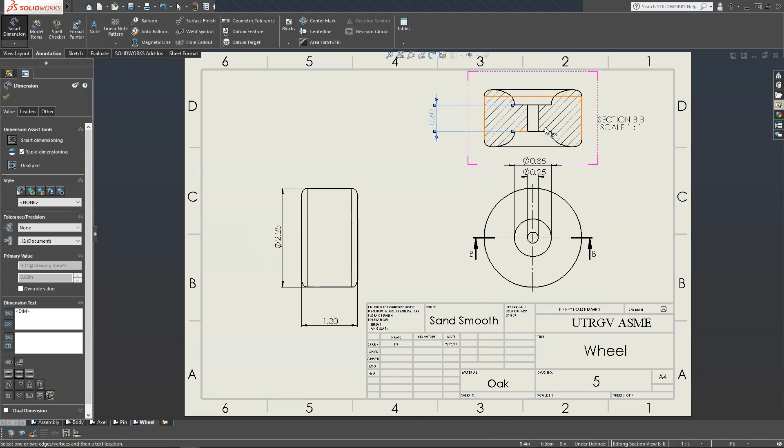Bam, so yeah that's good. Sometimes you don't even need to do these, but they help with visualizing. Especially in assemblies, you can do these also for assemblies. It'll just help to show where parts are in relation to each other, how they fit together, things like that.

And that's pretty much it. You could also do exploded views and stuff, but you'd have to configure those, and that's something for another workshop. For now, that's the end of these drawings. You give them one more look-see over, make sure everything's right.

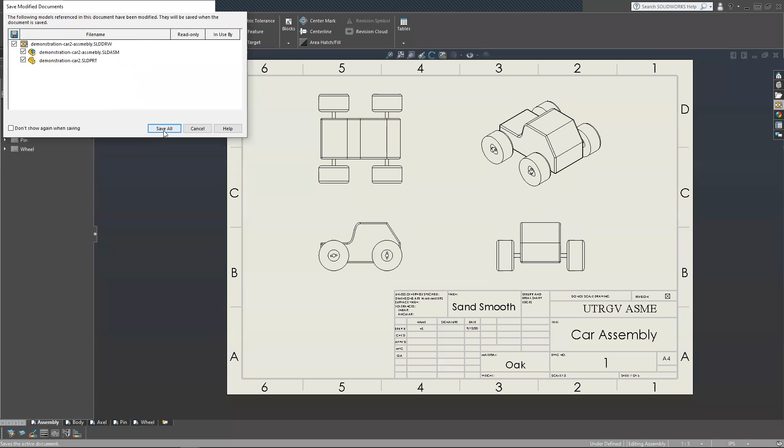And then we save them. So we'll hit save. It's going to ask you, if it has dependencies, it'll say, do you want to save these too? Yeah, if it's going to update a drawing preview.

And like I said, these can have the same names as the parts because they're different files. So it's always important to look at the type of file you're doing. They're drawing files, draw, SLD, DRW, that kind of thing. Yeah, that's good. We'll save it. So now this drawing file is saved, and when we close it and open it, it will load these.

But we can also save it as a PDF or really any image format we want. And that's good for showing it to people or printing it. You just hit this save as. Sometimes it says update drawing view, bro, it's kind of weird. And see, if you click this drop down arrow.

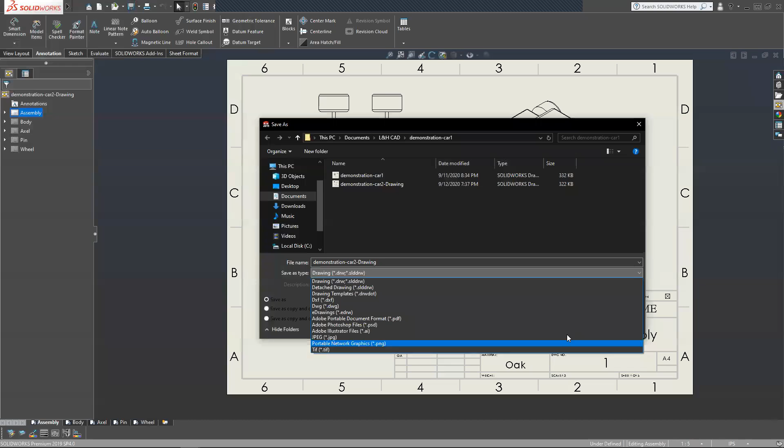Right now the drawing is selected because that's the default. You can save it as different drawing type files, like different engineering type files, drawings, or you can save it as a PDF, Adobe Portable Document Format, a Photoshop file. It's pretty crazy - Illustrator, JPEG, TIFF, PNG, the best. We want it as a PDF.

Well, bam, you can save it. It'll ask, okay, what do you want to export? And then you just make sure all the drawing names are selected. Click OK, and then it's done.

So you can go to your files, I already have one open here, and see, bam, you can click it. I have mine in my other window, what, bam, it's got it. Even the sections.

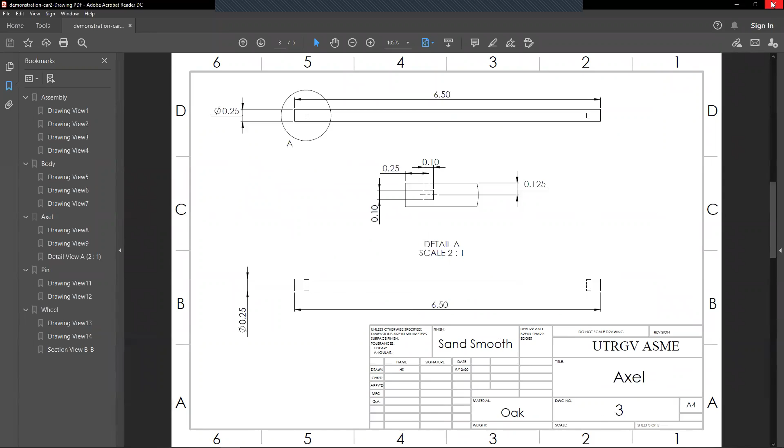It's pretty Gucci, it's pretty nice. You can scroll through it, it's different pages, just like that. Did I not put the scale for the axle? Damn it. But for all intents and purposes, that's it for this lecture, workshop.

Got any questions from the chat? Please. What's up, Jude? You got a question? Yeah.

Well, I hope all you new freshmen or new engineering ASME members found this informational. Hopefully you will be applying these skills soon in our projects and things like that. So I hope to see that happening.

Oh no. Okay, I'm back. Jude, can you hear me? Okay, all right, my Zoom froze.

Okay, well, there's no other questions. That's pretty much it. So thank you for attending and watching this workshop. And like I said, hopefully you use these skills soon. The best way to work on your SolidWorks is to practice - find something around your house, measure it, design it, assemble it, that kind of thing. Find things online to try and assemble. And yeah, the best way to learn is to practice. So yeah, until next time.